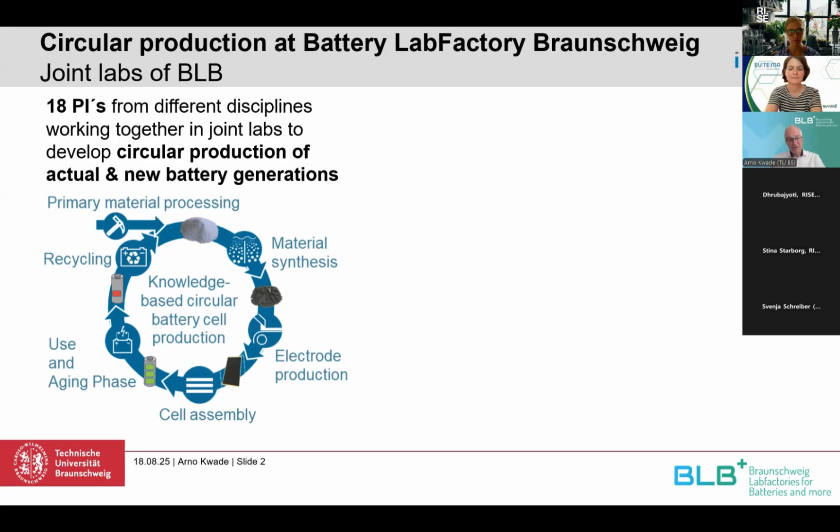And this we do currently in 4 joint research labs. The biggest one is the production lab, so the original BLB. You can see it on the left corner here.

And we have a few more buildings and facilities, so a diagnosis lab where we can have a look at aged cells especially, and build half cells out of them. We have a new education lab, which is not fully finished, but almost. And we have our circular lab, in which we have especially our recycling activities.

And today we will also place a first stone, let's say, for a new building where we will have the entire circle again, but then for new battery generations.

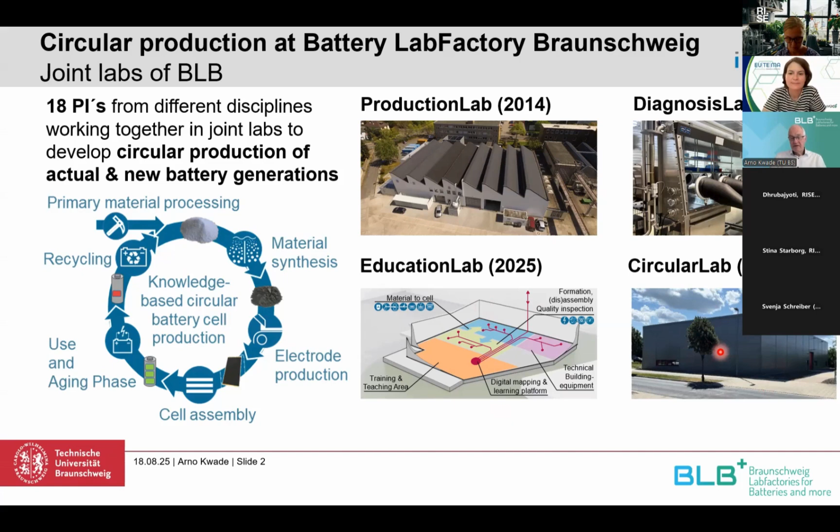Now looking at the classical route, that means wet processing of the electrodes. We have the electrode production with pre-treatment, mixing especially, then mixing wet, then the coating and drying and the calendering, and then the assembly of the cells and the finishing of the cells. I think you all know that.

And if we now look at the energy demand for the different process steps, you can see that a lot of energy is required in the coating and drying step. I know there are also other studies which maybe show 30% of energy, and it's almost, let's say, but it's really the biggest part beside formation and aging.

This can be dropped by maybe having an intelligent usage of the energy during discharging. And the post-drying also depends on how you operate the entire process chain, and some energy you need for the dry room. But still, the highest amount goes into coating and drying, and it counts about 30 kilowatt hours for 1 kilowatt hour of battery capacity.

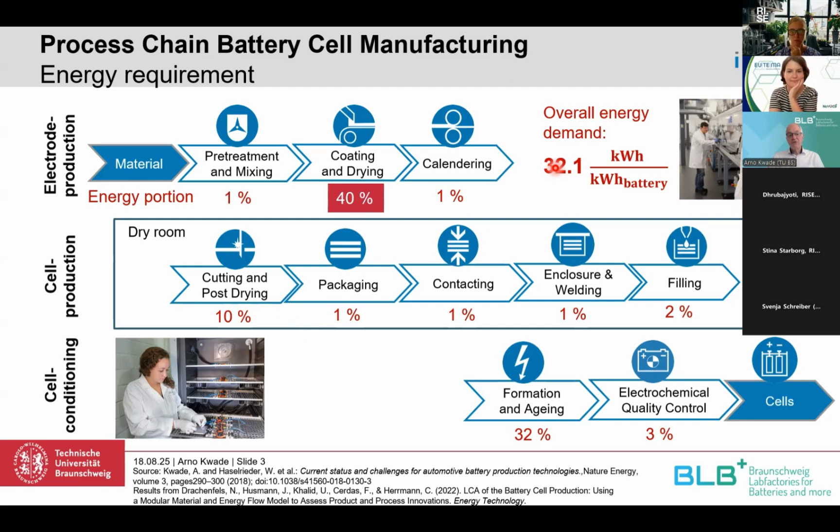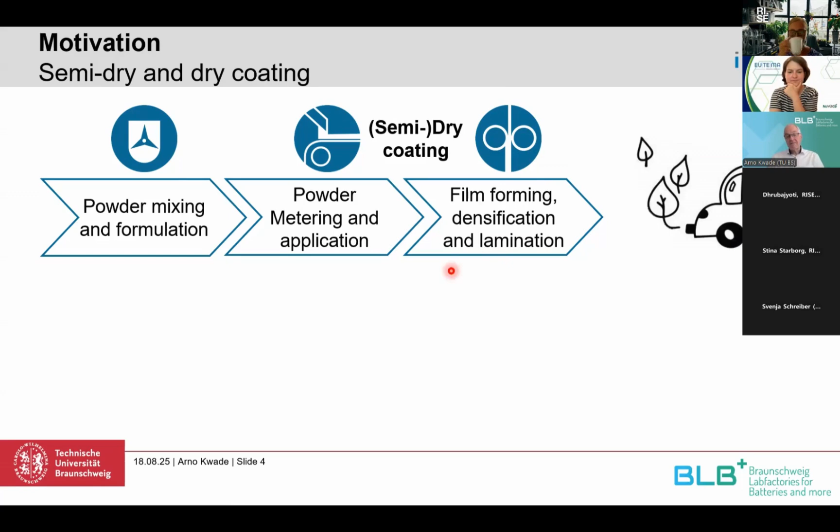And the question is, how can we reduce these 40%? And then we are already in our topic - that means we have to look for dry or semi-dry coating. And by that, we not only decrease the energy demand, we also shorten our process chain.

So we have a dry powder mixing and formulation, or let's say semi-dry. In a special case, then we have to meter the powder, dose the powder, which is an important step, but doesn't really take a lot of energy or space. And then we have the film formation, and then the lamination maybe on the current collector.

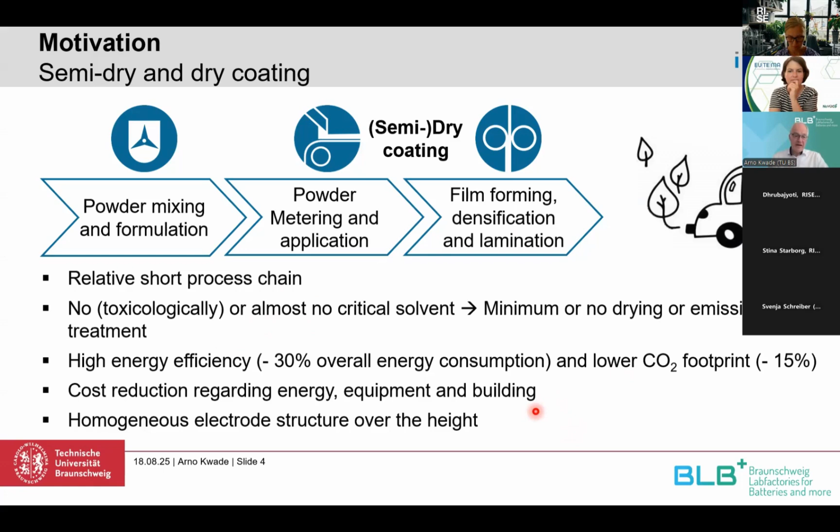And by this relatively short process chain, we can also avoid critical solvents. We have a high energy efficiency, as already said. We can lower the CO2 footprint, and also overall lower the costs. We can even, in most cases, increase the performance of the electrodes. And all that shows that it is really valuable to work in the direction of semi-dry and dry coating.

But how does the electrode look if we change from wet to dry? First of all, you see here the wet process - typical wet dispersing, and then coating and drying. And you see that we usually have the binder, or the carbon binder domain, as bridges between the particles, as we have already, for example, simulated.

And we use some NMP or something to dissolve the binder in the solvent. In dry coating or semi-dry, it's similar, but we have, let's say, no or only a little bit of solvent, and we usually have binders which have a fibrillation, like PTFE, which is by far the best binder we can use right now.

And the binder domain now is a spider web-like carbon binder. It's more that you put your particles inside this, let's say, spider web, rather than gluing the particles together. So it's, I think, a different adhesive system.

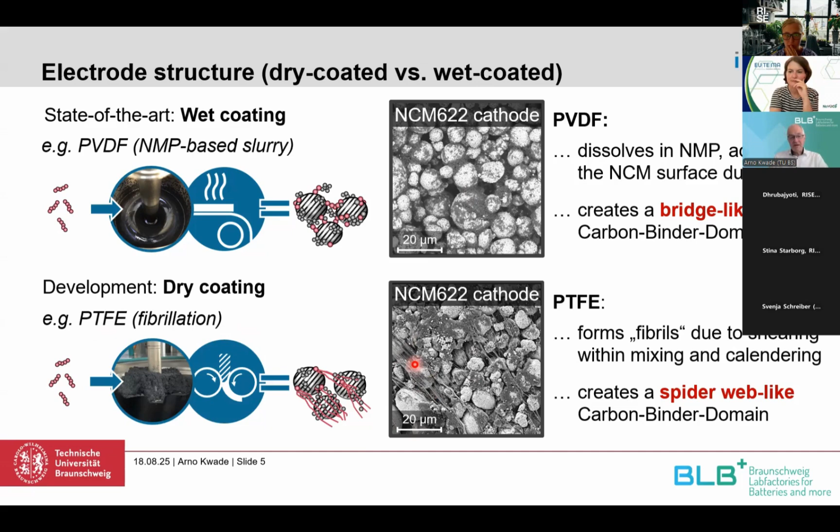Now let's start with the dry coating. The typical dry coating process today looks like it is shown here. You have a mixing process, then sometimes a conditioning process where you decrease, for example, the size of the granules produced during mixing. Then you have the dosing by a powder feeding system, and then you have film formation, in this case the most typical, by a calendering process. We will come to mixing, feeding, and film formation later in more detail.

In the case of mixing, we can distinguish between batch mixing, like is also typical for wet processing, and continuous mixing, for example using extrusion machines. What we have to do is prevent the breakage of particles, for example in the mixing step or also during film formation.

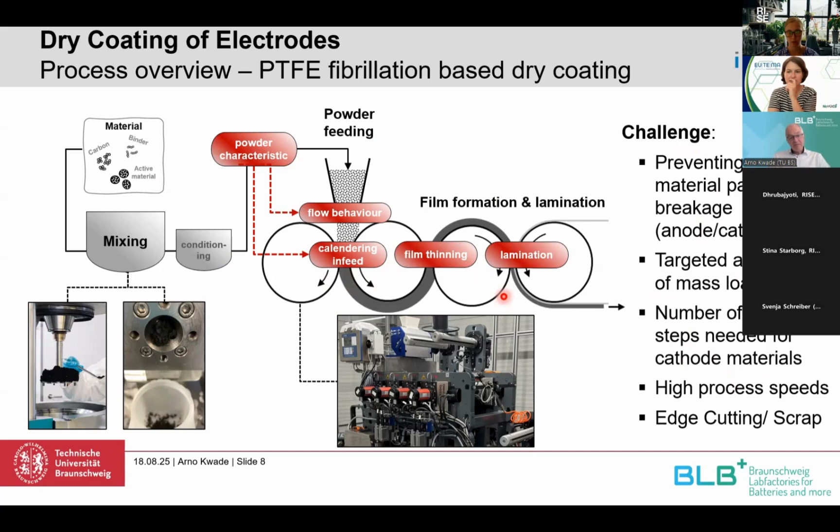We need a really constant and precise mass loading, meaning a good knowledge about the powder feeding. We have to know exactly the steps for the cathode material. We need high process speeds, good edges so that we have less scrap, and maybe also a strategy for handling the scrap afterwards.

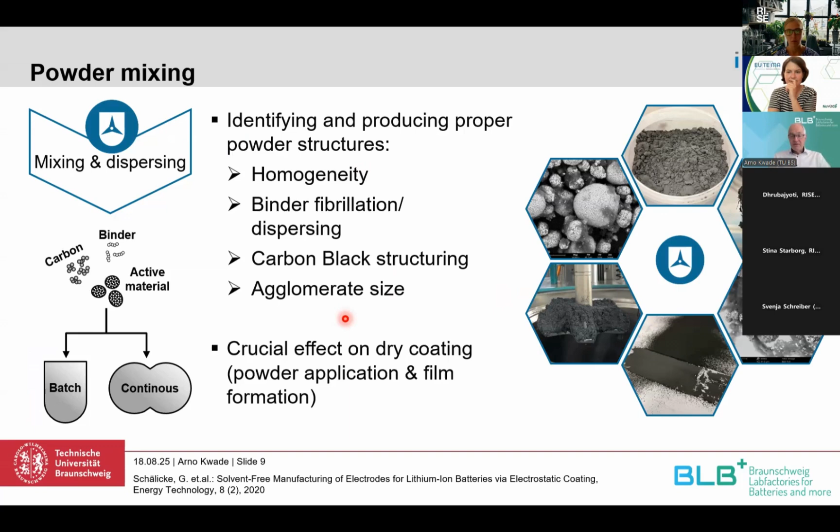Coming to the powder mixing process, as I said, continuous or batch. Important at the end is that we have a homogeneous powder with good fibrillation of the binder. The carbon black also has to be structured because there is no wet process doing that afterwards. And the granule or agglomerate size has to be adequate for the following film formation step. This mixing step at the beginning is really crucial for getting a good dry coating.

In this presentation, I thought it might be interesting to use a study we already published on how different active materials influence the dry coating process: graphite, LFP as a low-cost cathode material, and NCM as a more high-cost, high-performance active material. In all formulations we had some carbon black - on the anode side 1.5%, on the cathode side 3%, and we almost always had 2% of PTFE binder.

Here you can see the particle size distribution. The NCM has the smallest particle size, and also the most narrow particle size distribution. Then there's LFP, which is polydispersive - there seem to be some primary particles. And we have the graphite, which is the widest and coarsest material.

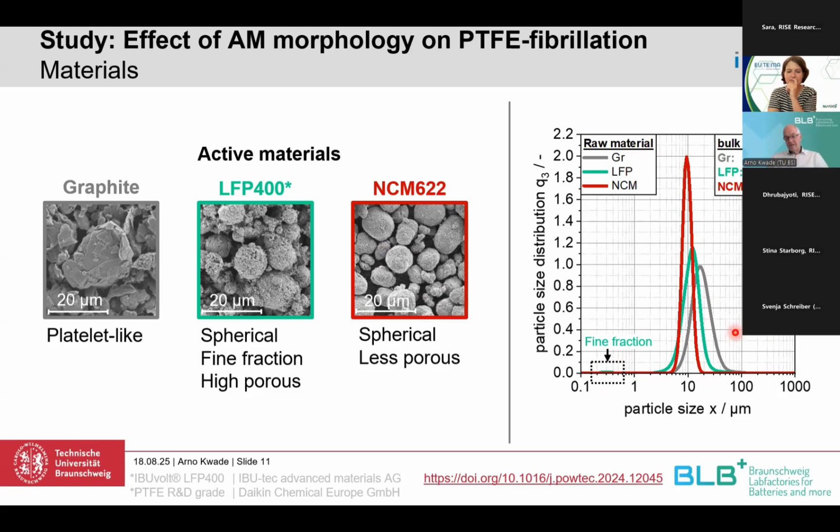Now, having a look at the results, you see that at first there's no real effect on the particle size distribution, but if you look at the granules, only a small amount of the graphite really agglomerates and forms these granules. After a longer fibrillation time, where the fibers get smaller, there isn't really a high increase in granules, and even after homogenization, most of the graphite is still in primary particle form.

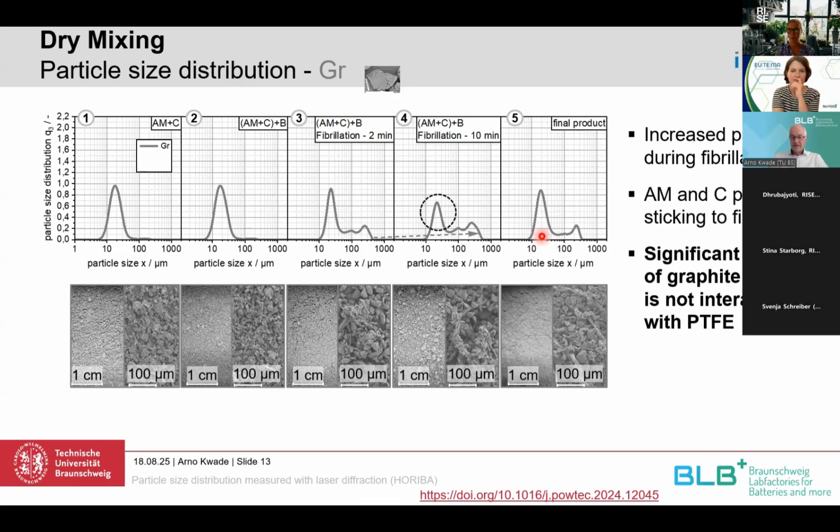So there's not such a big interaction of the graphite particles with the PTFE.

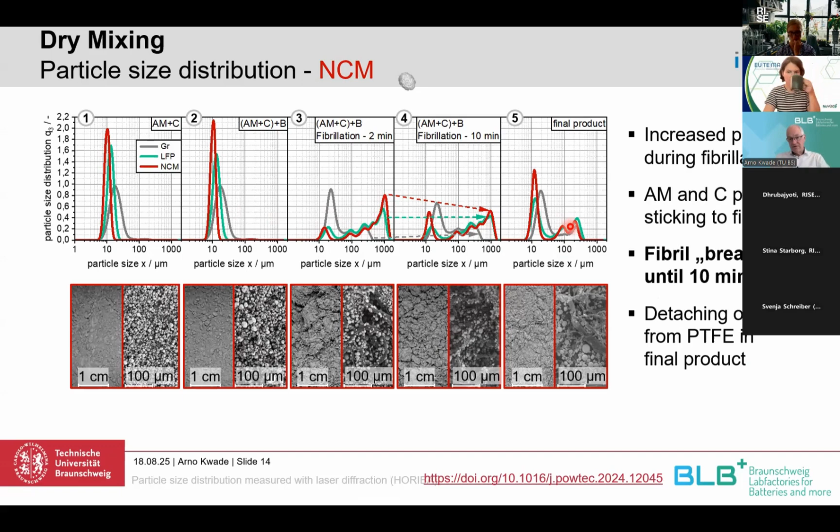It looks a little bit different, or somewhat different, if you look at the cathode materials. You see here that we have much coarser and more granules, especially at the beginning of the fibrillation process. So there's a decrease with increasing fibrillation, and a decrease of fibril size and length. After homogenization, we also have a decrease in granulation size and granulation amount.

Looking at the bulk porosity for these different materials, you see there are quite some differences. After fibrillation, all have an increase in bulk porosity, so the volume of the overall powder increases. But there are some differences in the porosity: the LFP has the highest porosity, the NCM the lowest.

Also, you see that after 2 minutes there's no further fibrillation. It seems there's more degradation, or a decrease in fibrillation, at least in length, so that we have a more constant or decreasing porosity of the powder.

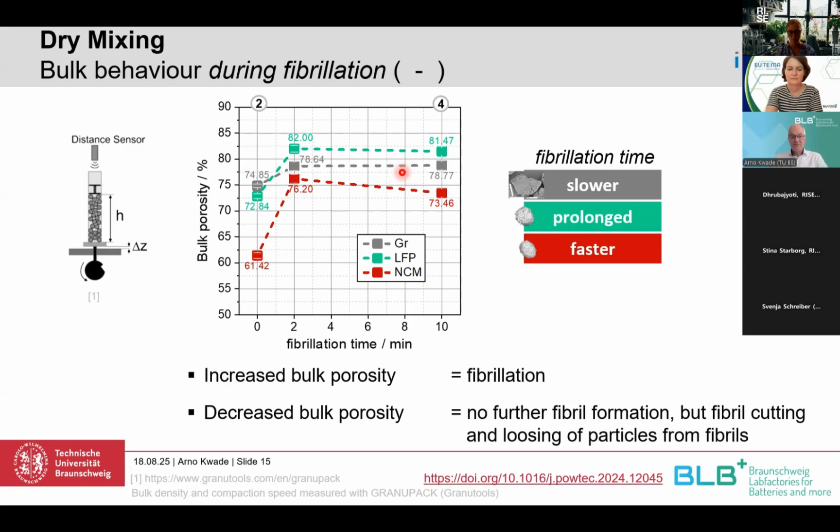Now coming to the dosing: if you look in the literature and also the available patents, you see that we already have some pre-metered applications, typical for wet processing. For example, you can choose a needle roller, a vibration chute, or a planar sieve, something like that. But what is most common are still self-metered applications using a direct roller infeed with calendaring. There are also some electrostatic applications which are patented.

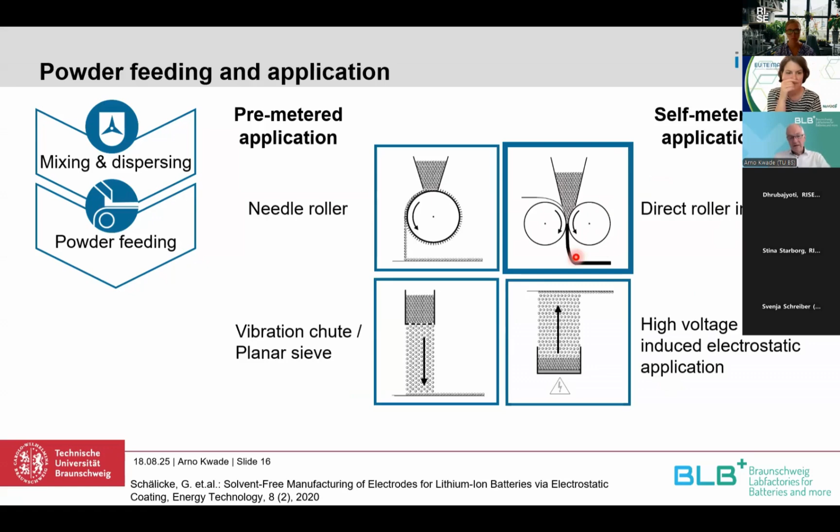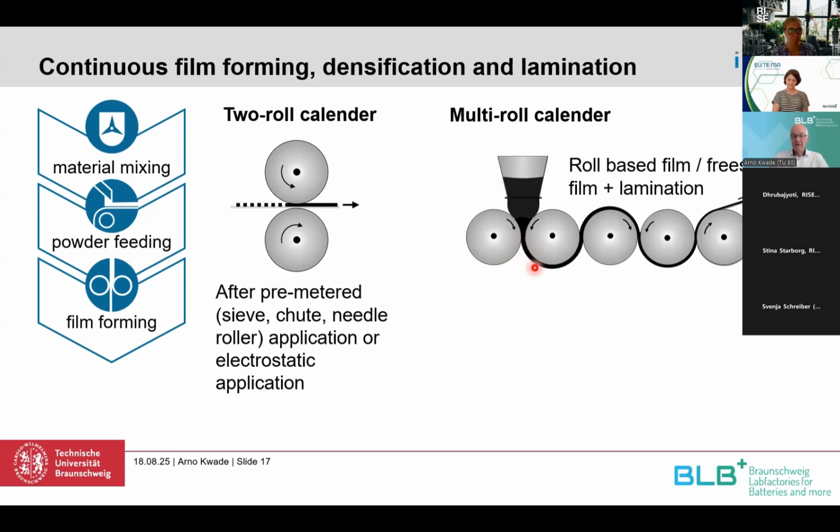But by far the most common is using a direct roller infeed in a calendaring machine. This calendaring machine is really necessary, independent of the dosing method, to stabilize and form the layer. It can be a simple 2-roll calender if you have a special dosing system, but usually it's a multi-roll calendaring machine, where you form the film, decrease the thickness of the film, and then laminate it onto the substrate.

The question is how we can get the right film thickness, as the films are too thick due to the no-slip condition.

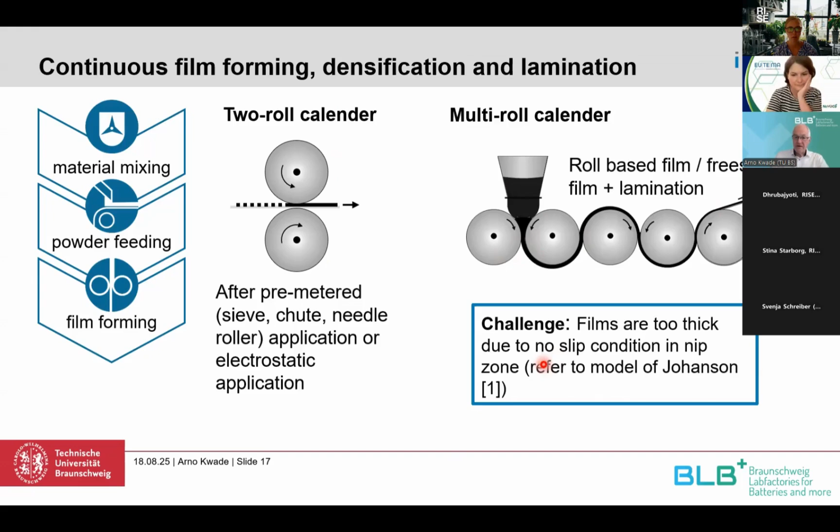If we look at the theory, there is a model from Johanson. I wanted to show it to you briefly, since there's already some old literature available on normal roller granulation. You see there's this acceleration zone, then we have the slip zone, meaning there are still speed differences between the powder and the roller. Then we come to the nip zone, where the powder is really connected to the surface and there's no slip anymore. That means the powder is taken into the gap and compressed, and then the film is formed and you get the elastic spring-back.

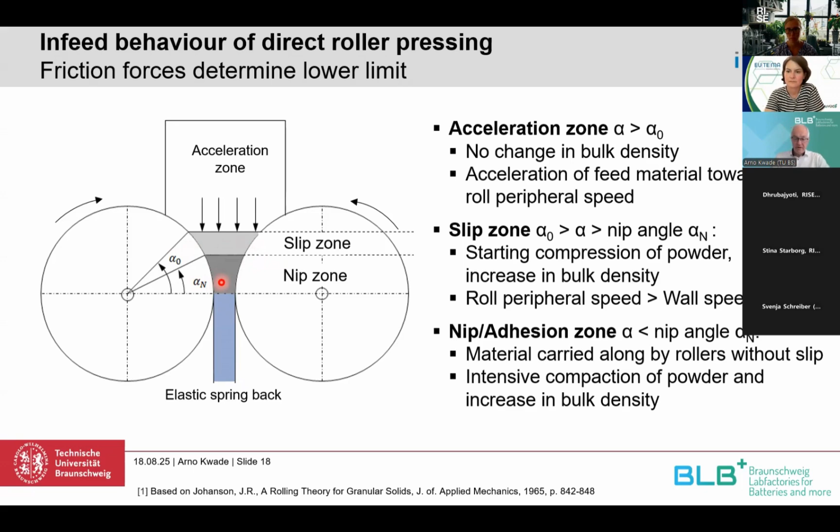But the key question here is really the wall friction angle. If the wall friction angle is high, then you get this nip zone very early, and you end up with a lot of material that has to be compressed, which automatically gives you a thicker electrode, or the torque of the rollers may not be sufficient to form the film. So low wall friction angles are advantageous for getting thin films.

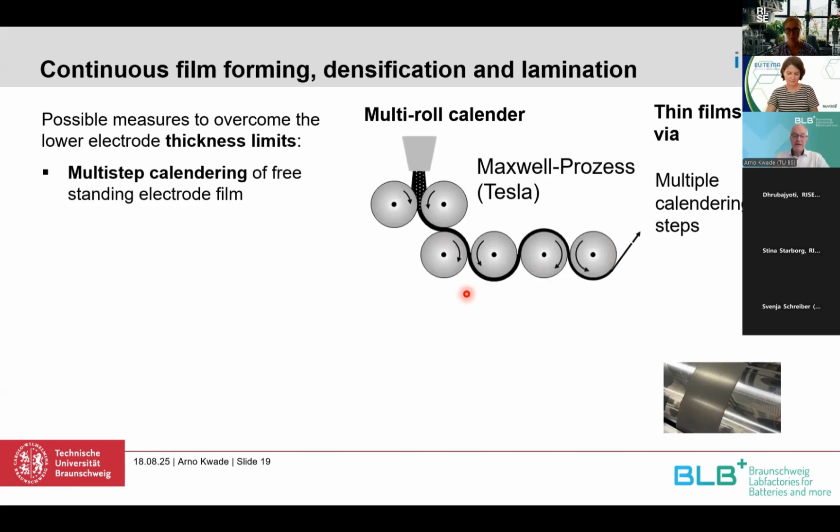We can see this later, but first, the question is how we can get thin films. One possibility is multi-step calendering, which is a typical Maxwell process. We can also have high differential speeds between the rollers, which affects the film thickness a lot, so that you get the right thickness already with one pass through the roller gap. You might also be able to have exact pre-metering into the gaps, which can also give you a good film thickness.

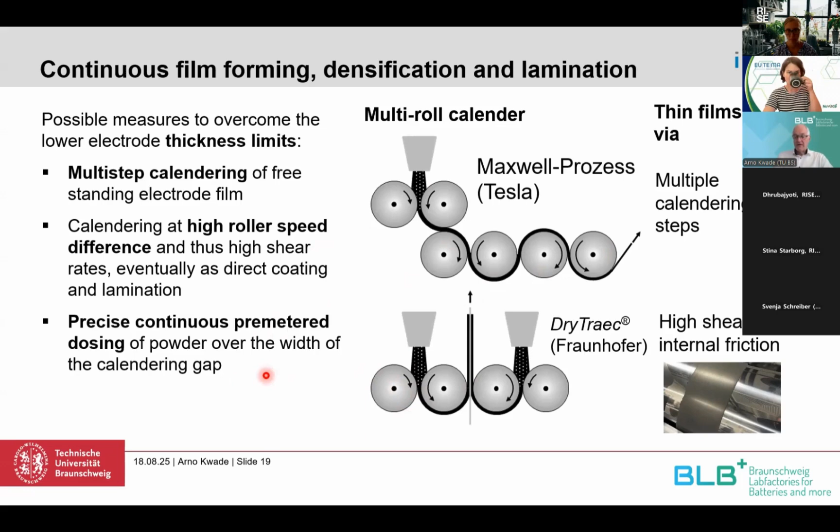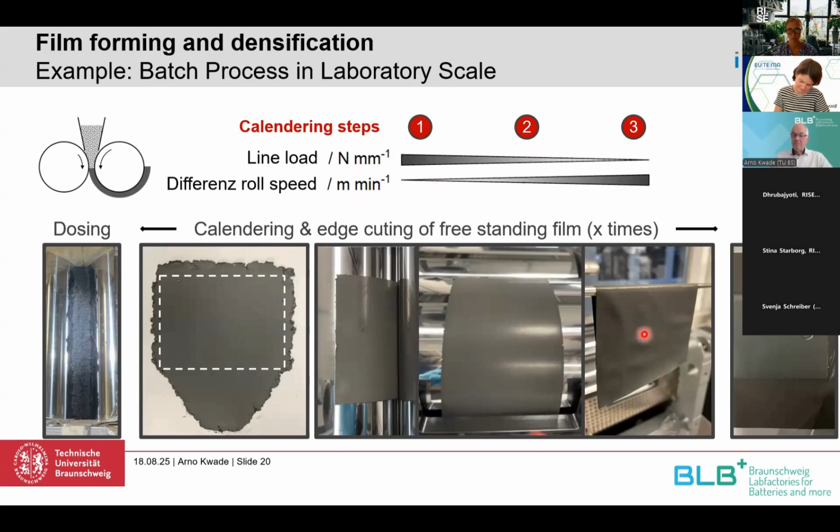If we do that in a more discontinuous way, you can see it here: for example, by increasing or decreasing the line load from the first to the last step, but increasing the differential speed of the rollers, you get thinner films. At the end, it looks really like a thick piece of paper, which you can then nicely laminate onto the substrate.

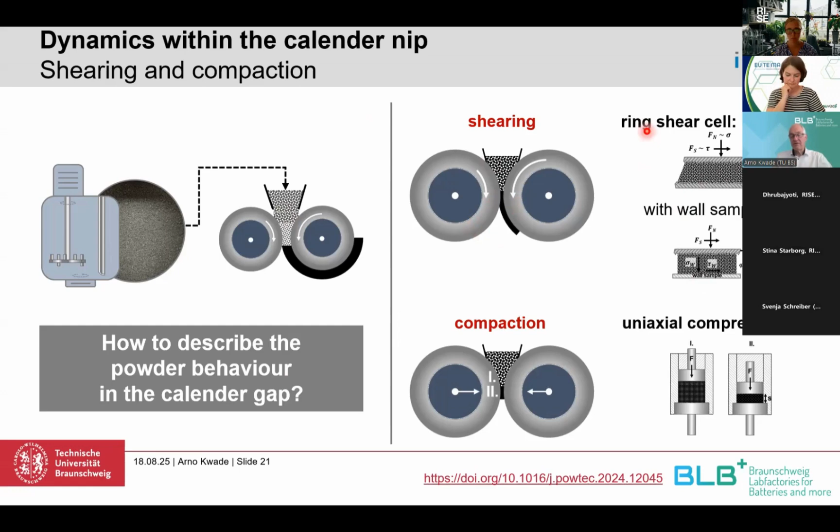Now coming to this film formation step, you see that we have normally compaction, normal stresses, but depending on the differential speed of the rollers, also some shearing. And we thought what can be a good measurement technique. So we have a ring shear cell and a uniaxial compression to describe that.

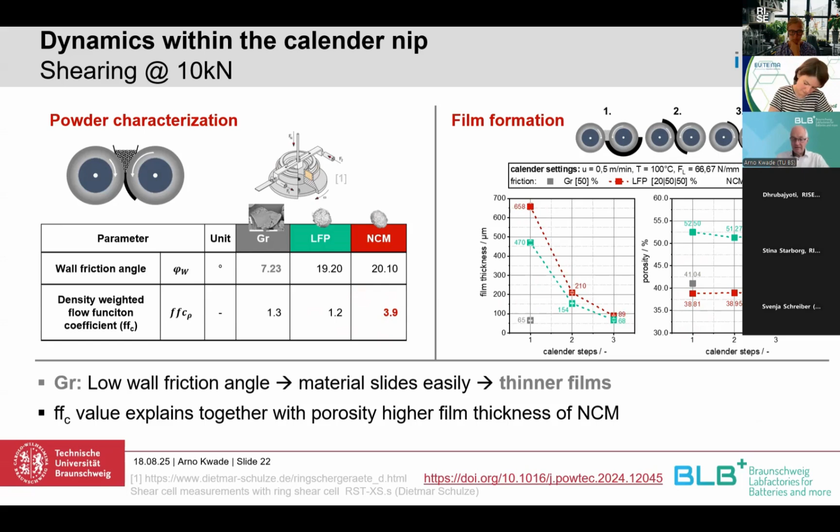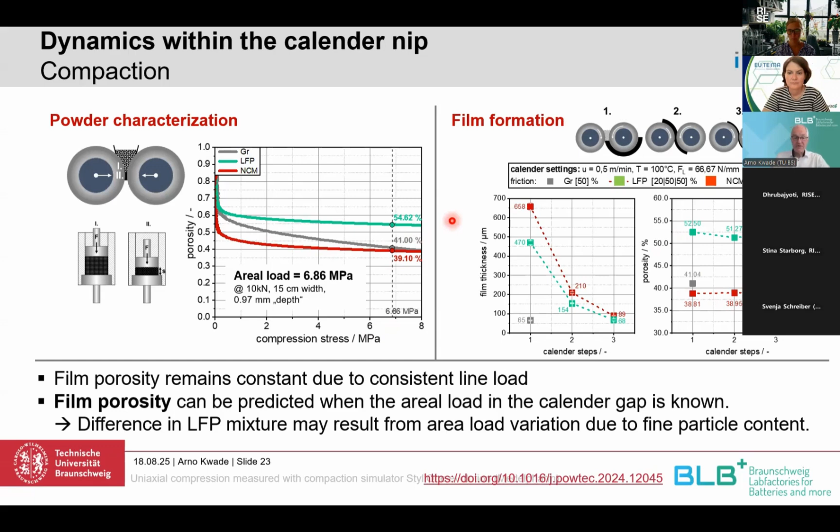For example, with the NCM we have about 40% porosity, which we also found in the later film, similar for the graphite, and the LFP gives us much higher porosity. So this is really a nice method to predict what happens later on in the calendering gap.

So this was some results I wanted to show for the dry coating, and I think it's currently a really favorable process, with a lot of companies looking into it and installing the first plants and already operating them. Now I want to come to two more topics very shortly, with less time, which are not yet installed in industry: semi-dry coating and solvent-free all-solid-state cathode production.

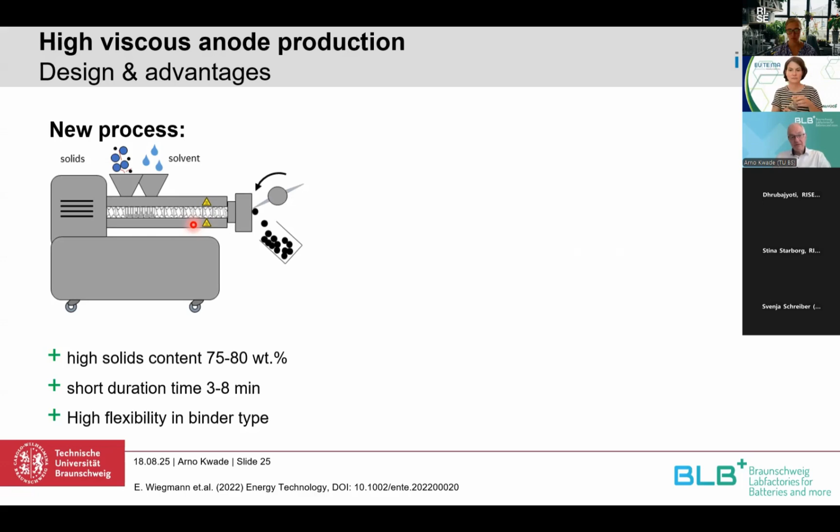So the semi-dry coating is a new process which we developed at our institute. We use an extrusion machine, but it can also be a batch mixer, where we produce wet granules with a small amount of solvent. These wet granules, shown here in this case with a cutting knife, give us the granules, but there are also other possibilities to get wet granules without cutting them.

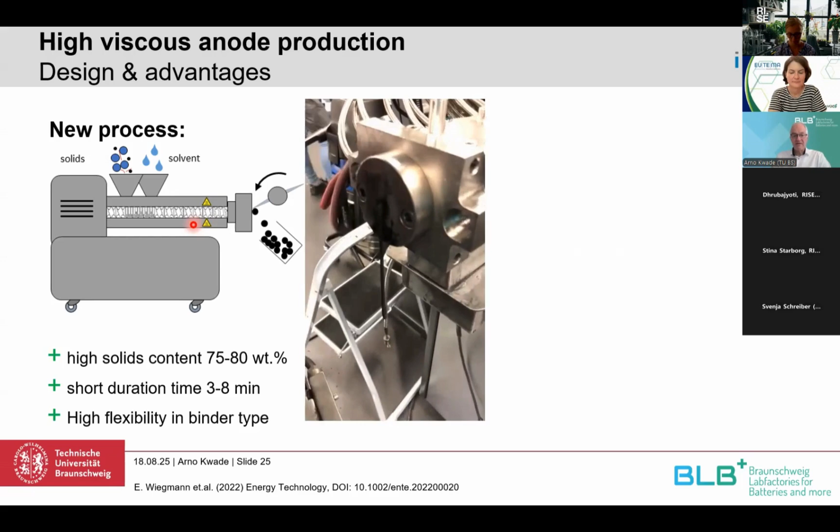So these are the granules, in the size range of a few millimeters. We then dose them onto a multi-roll calender, in this case a 4-roll calender, and form the film similarly to the dry coating process. Here we have a polymer foil to avoid high adhesion to the roller surface, and we have heated rollers, which is also typical for dry coating — I didn't mention that before — so that we can also dry the electrode just by heating it this way.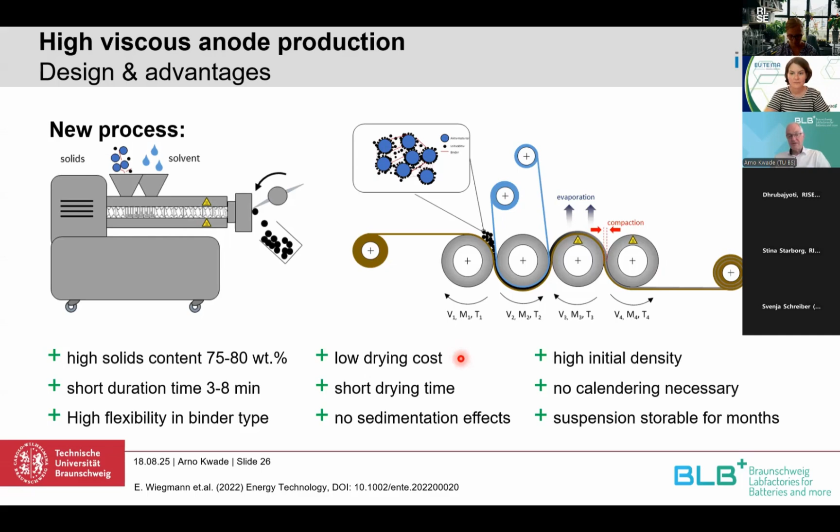And then we also have a really short process, as we've seen for dry coating. We have some drying costs, but they are really low compared to the typical normal process — short drying times and so on. No further calendering is necessary, and so forth.

What we found is that the saturation degree of the granules is very important to get a good result. We are at about 60% of the pores really saturated, filled with liquid, so 40% is air, and that gives us a good possibility in the following steps.

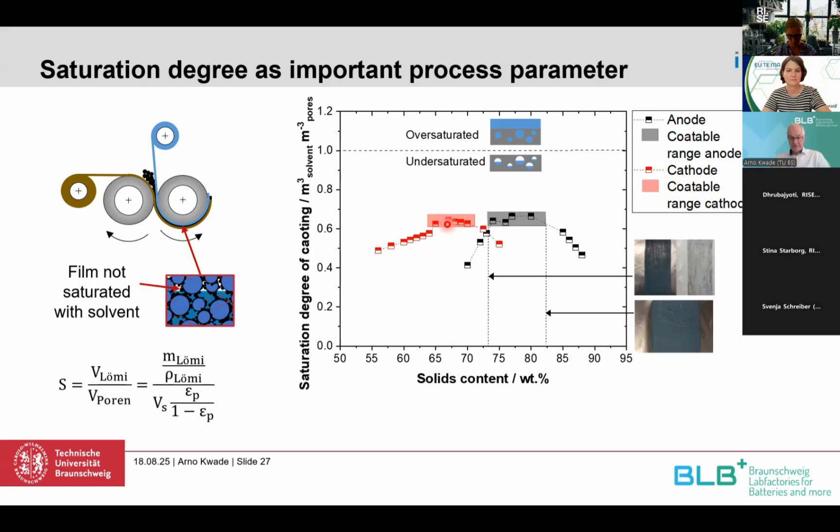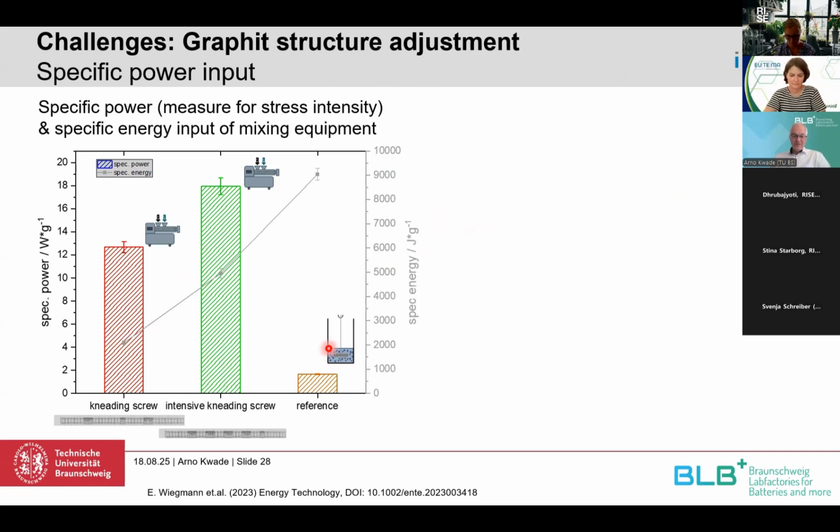When you compare different extrusion screws, by increasing the screw intensity, you get a higher specific power input to the suspension, or the wet powder, compared to the wet process, shown here on the right side. But in the end, the specific energy requirement is much lower with a kneading screw, a little bit higher for the intensive kneading screw, but for the reference process, because you need a much longer time, the specific energy input is by far the highest.

Depending on the intensity of stresses inside the extrusion machine, we get different microstructures. If we have really high intensities, we will also break some graphite and get a closer packing.

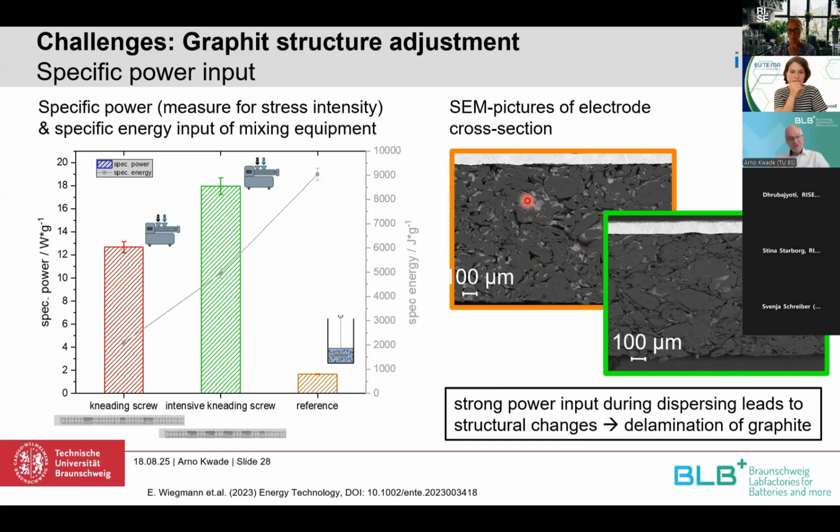What can be seen here, which is not fully advantageous: if we compare the discharge capacities, the reference is the lowest, at least for lower C-rates, and we get the best results for the kneading screw, having a moderate dispersing of our particles. It looks a little different at higher C-rates, where the results come closer together, but still the kneading screw is very advantageous, giving a better result than the normal wet process, which is also reported in the literature, for example for dry processing.

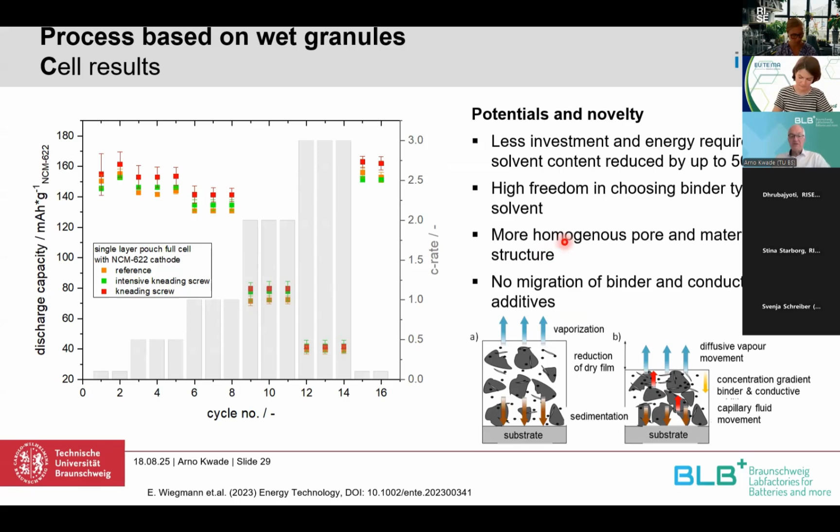Like we found for dry processing, there's no migration of binder and very homogeneous pore and material structure. And we can use binders which are typical also for wet processing, like CMC and SBR.

Now, last but not least, for maybe 2 or 3 minutes, I want to talk about the solvent-free solid state cathode formation. As you have seen for the dry processing, that has advantages for cost and energy demand, but also especially when taking sulfide solid electrolytes.

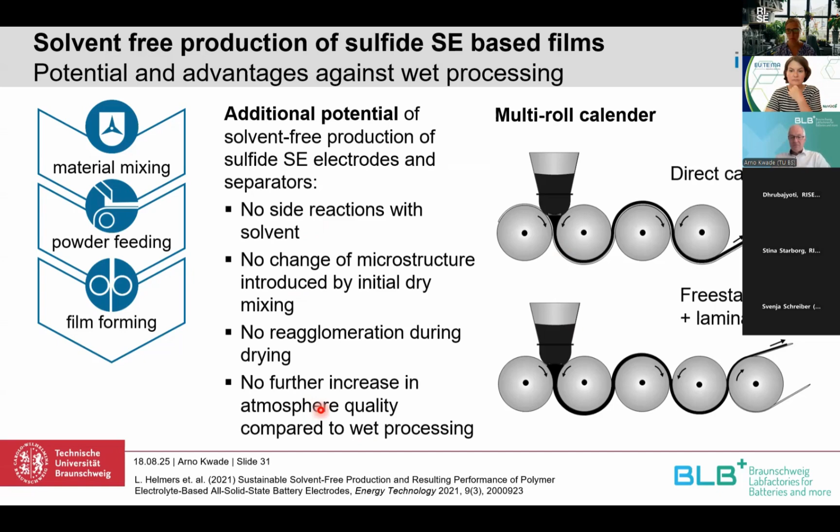There are no side reactions with the solvent possible. There are no or almost no change in microstructure. There should be no reagglomeration during drying, which might be a problem. And it's easier to have a good atmosphere to avoid degradation of the solid electrolyte.

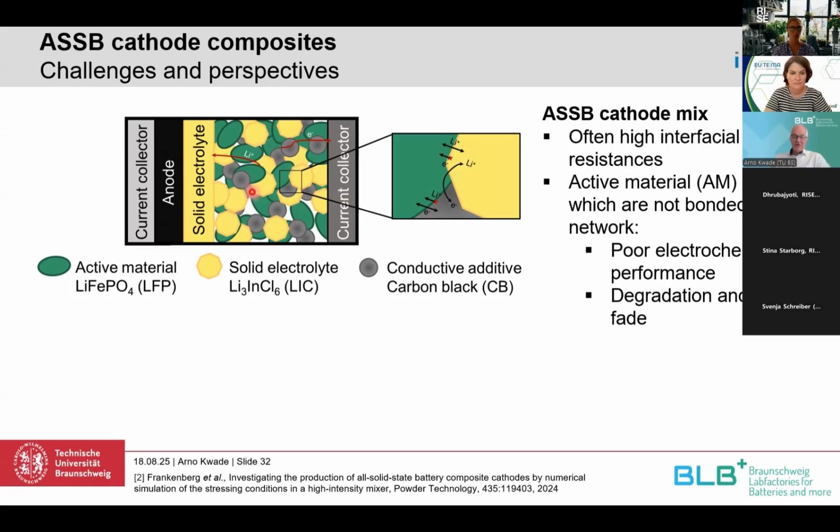We had a nice project where we looked at the mixing of these different components, the active material, the solid electrolyte, and the conductive additives, and how we can get a good mixture and then a good microstructure within the cathode. We do it together with the Janek group, which looks more at the electrochemistry and microstructure, and we at the processing.

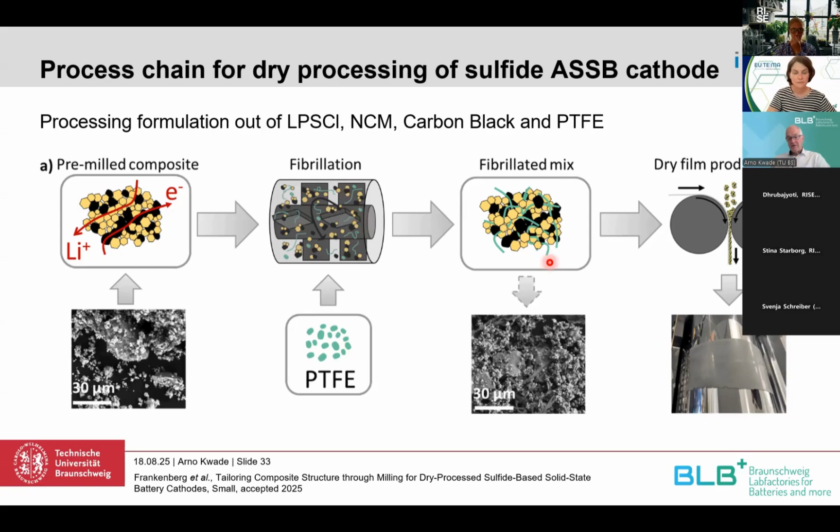One of the recent results, just published in Small by Finn Frankenberg, or it will be in a few days—it's at least accepted. We have this process chain: a pre-milled composite, then fibrillation of the PTFE binder, then the fibrillated mix, and dry film production.

If we look into the results, we see that even compared to the powder which is only normally processed or compressed, the electrodes or cathodes we produce by this dry film formation show an increase in performance due to this film formation using the calendering machine. We are almost getting the reference capacity of our material by forming this dry film for this solid state battery cathode. This is really, I think, nice to see.

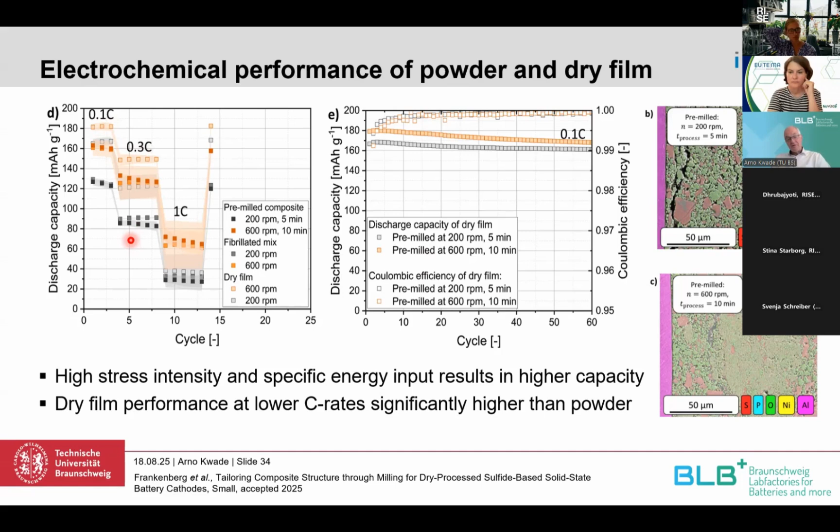And I think dry processes are really the one, or the way to go, for these sulfide solid electrolytes.

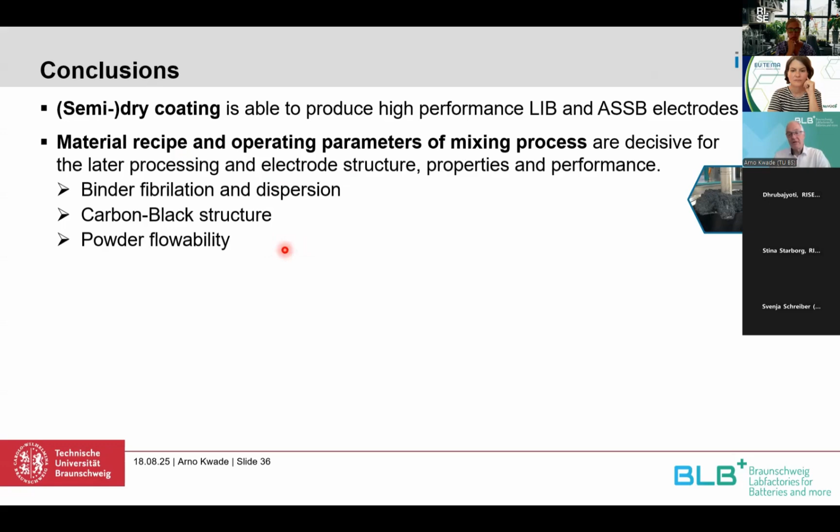So now I want to come to my conclusion. I hope you have seen that semi-dry coating, and dry coating especially, is able to produce high performance lithium-ion and also solid state battery electrodes, and that we really have to look at the mixing process. That is really crucial for the binder fibrillation, for the dispersion of the carbon black, but also later on for the powder flowability, granular size, and so on, which are then important for the film formation during the calendering process.

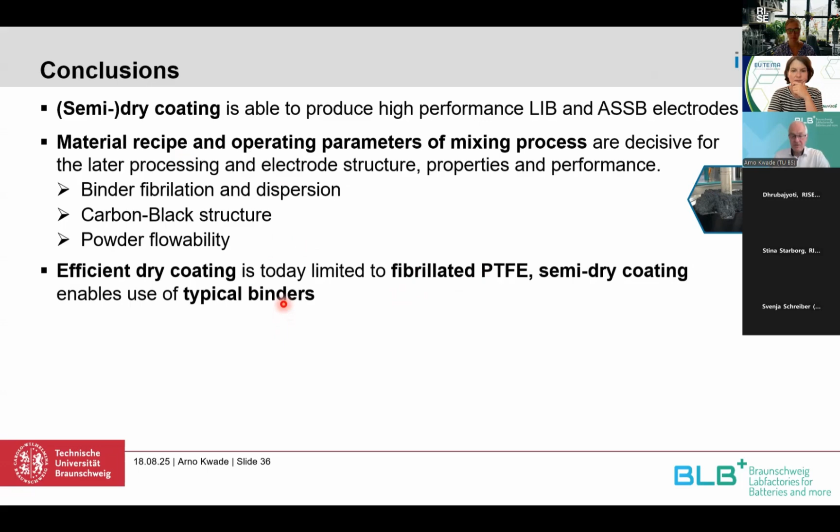Today, dry coating is limited to the fibrillated PTFE, so we might find other binders. In semi-dry coating, we can also use typical binders like CMC or SBR. There are still some challenges, but I think there's big progress, and industry is really starting to use at least the dry coating method in standard industrial production of battery electrodes.

So we need a homogeneous microstructure with good adhesion also to the electrode film or the electrode current collector, then constant areal loading, powder handling, and so on. But I think these are challenges which can be solved really nicely.